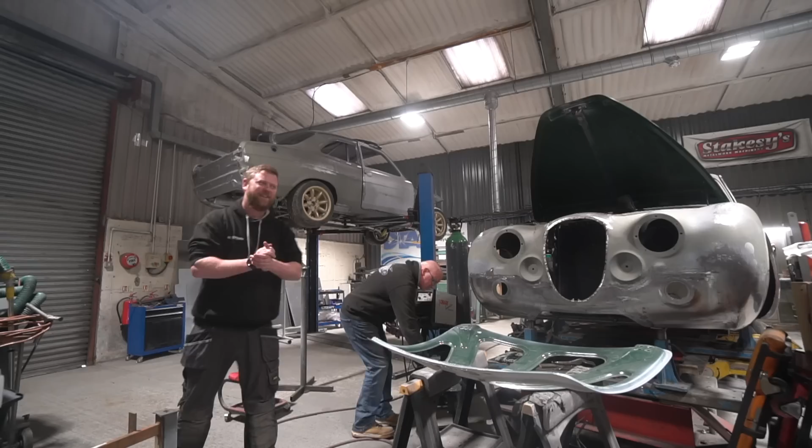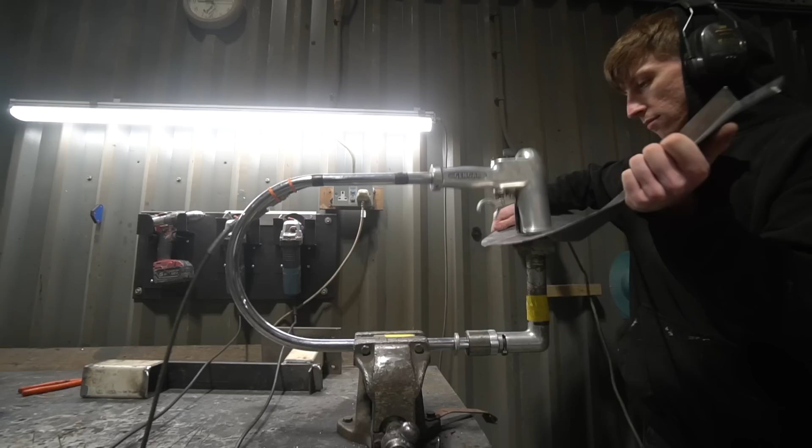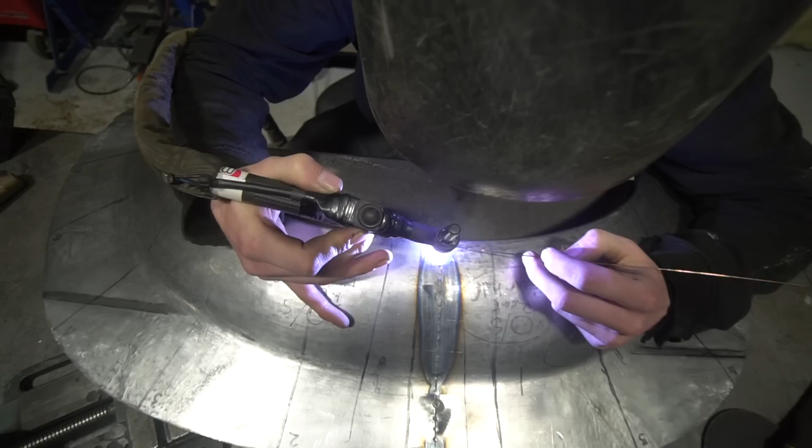I'm going to start with Project Kuma. We're obviously in the later stages of dry build on this. So essentially this week Sam's just been getting the subframes in, getting it to the point of rolling, so we can then get the front wings on, which is where Tom is continuing at the minute to do the hammer forming. In fact, I think he's done the hammer forming of the front arches, and he's at the stage now of grafting the halves. He's made them all in two halves, grafting the halves together, and then once that's done, that weld needs a degree of planishing to get the shape back in the arch.

So it's a case of welding the two halves together, putting them back over the hammer form tool and doing whatever planishing is necessary to get the shape back, so you've got one complete arch that's exactly the shape it should be. And once we've got to that phase, we'll be able to start cutting out the relevant bits of metalwork on this shell and grafting them into this shell. I'm not going to go massively into this one this week, but that's where we're at.

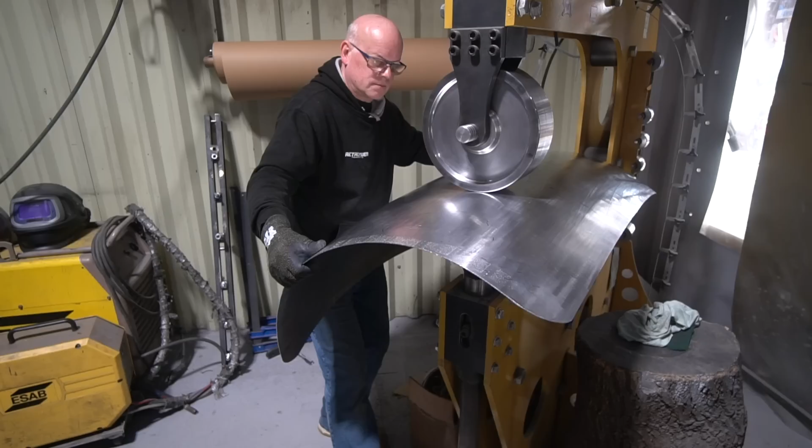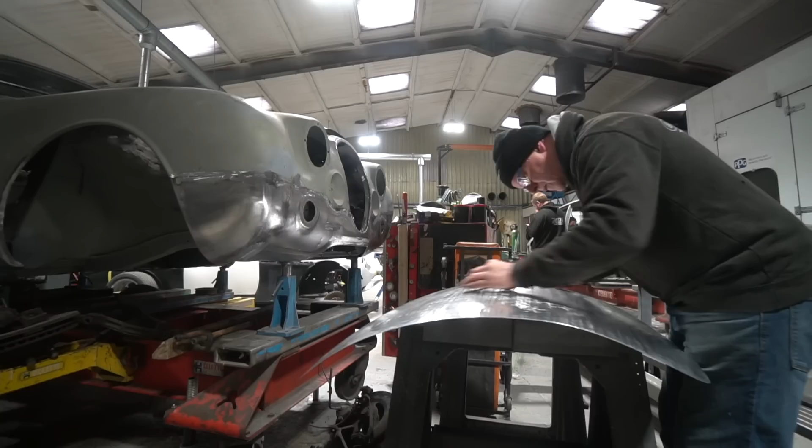Churchill, right, there's a few things on this, a few avenues of progress. One obviously right in front of me - Stu's been making the boot skin for this. This is actually very similar to Project Utah, the other 4-door Mark II Jag that we did, in that we're not only making a boot skin that deletes some of the original details - there's originally a number plate plinth on there which interrupts the shape of it - but also making it in aluminium.

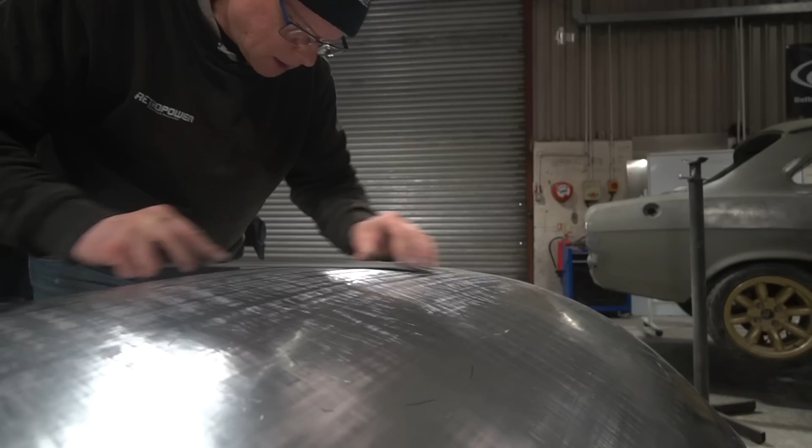If we're making a skin, it kind of seems logical to take advantage of being able to make it in a lightweight material. It's also easier, I should perhaps say, for somebody with Stu's ability to shape this sort of compound curve in aluminium because of its ability to stretch more easily.

So he's been wheeling that up on the English wheel, getting the shape in, starting on the edge tipping. So he's essentially now got a 90-degree edge, which will get it at this angle, ready for that to then be crimped all the way over 180 degrees to attach it to the skin.

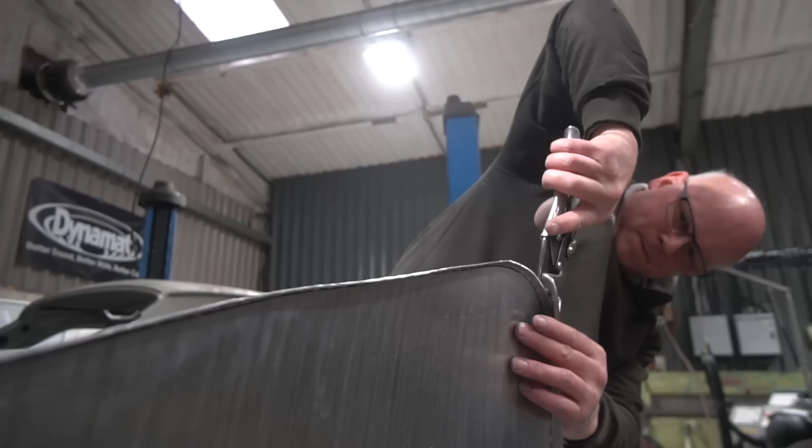But in readiness for that, because of the difference in thickness between the aluminium we're working with and the original steel, to get the panel gaps right he's been around and resized this flange around the edge here so that we end up with the same size panel gap with the thicker skin.

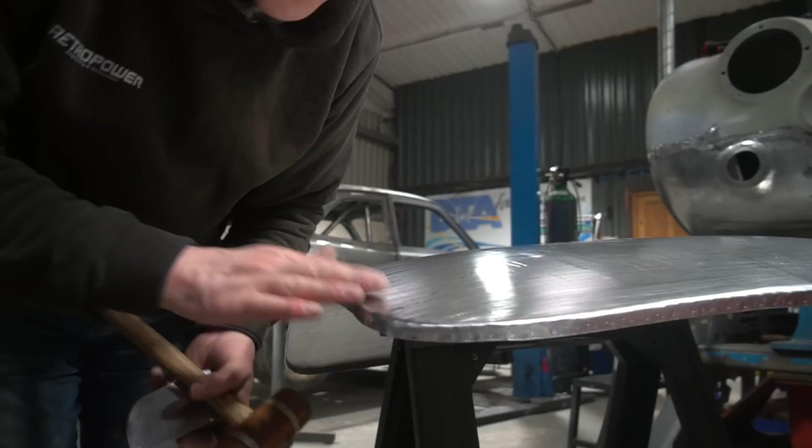And while he was at it, there's various holes on here which are access holes to components that attach to the original boot lid, which won't be attached to this. We thought while we're at it, we might as well delete those holes on the frame because they don't really serve any purpose after we've reskinned it.

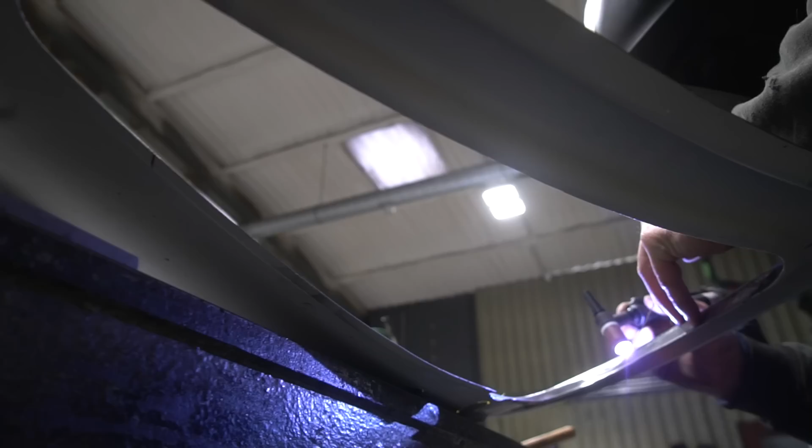So that's what he's done, and I think he's pretty much at the stage now of being ready to get that skin on. Next week it'll be getting the bonding adhesive on here, getting the skin on, hammering it all around, clinching it on. So we'll see that next week.

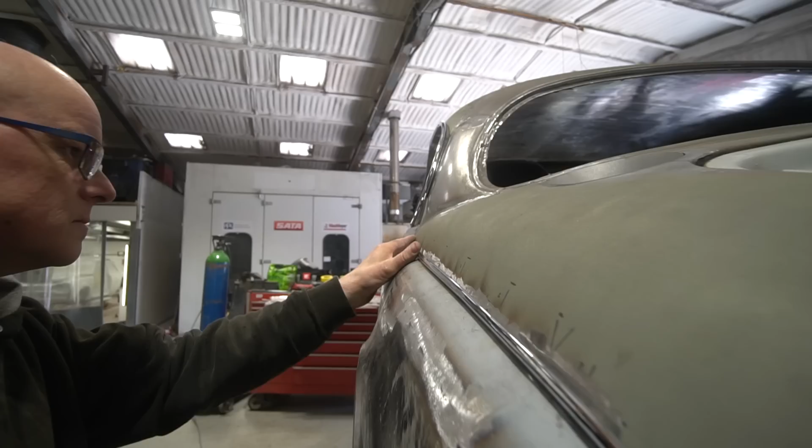There's been a few small details that Stu's been on with. One was looking forward to the chrome mouldings that go around the gutters. Obviously now we've done the roof shape change, the gutter shape is different, and we're aware we're going to need to come up with a plan there. We thought we might be able to reshape them, which we could, but also the B-post position is much further back, and originally the joint is above the B-post.

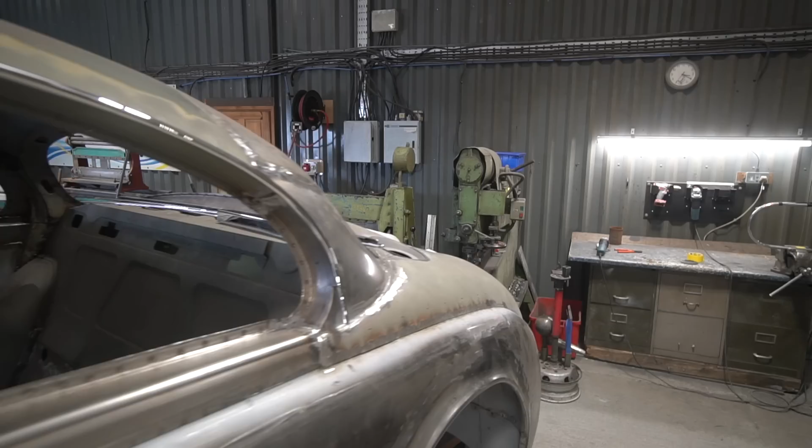Now it wouldn't be horrifically offensive if it was somewhere else, but it would be more logical if it was above the B-post, and it is quite difficult to form those gutter trims. So we're trying to come up with a solution that might solve that quite elegantly.

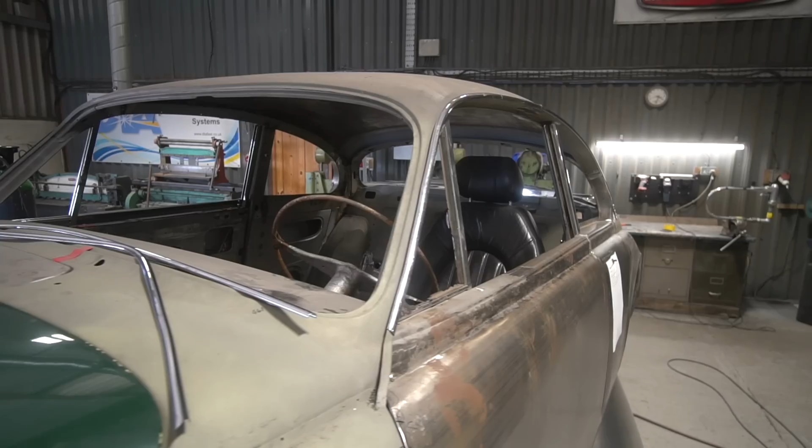One thing that Stu realised straight away is that on the E-type, the fixed head E-type, the rear part of the gutter trim is actually very, very close to the shape we've ended up with on the gutter here, more so than the Mark II trim. So we're contemplating using the rear part of an E-type trim, and trying to think of something that might be able to donate the front part and be long enough to go back to the B-pillar. Now we're wondering whether XJ Coupe ones might work.

I think there's more curve in this, but they may be close enough to work. So we've got a couple of those on the way just to try and see whether they work. Certainly they've got a similar screen angle and they'd be long enough. It's just whether the extra curvature in the roof is a problem or not. So watch this space on that one.

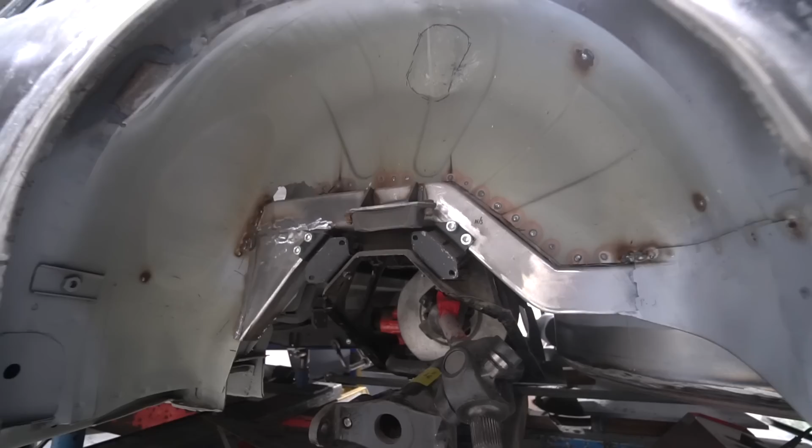He's also been on with the trailing arm mounts. This is now running an S-type independent rear end in place of the live axle. One of the things the independent back end has is a trailing arm, which does additional longitudinal location of the rear hub carrier. But rather than use the standard arms, because there's quite a nice structural section where the original trailing semi-elliptic leaf used to mount, it made sense for us to make our own mount that went into that channel, because it's a nice beefy part of the car.

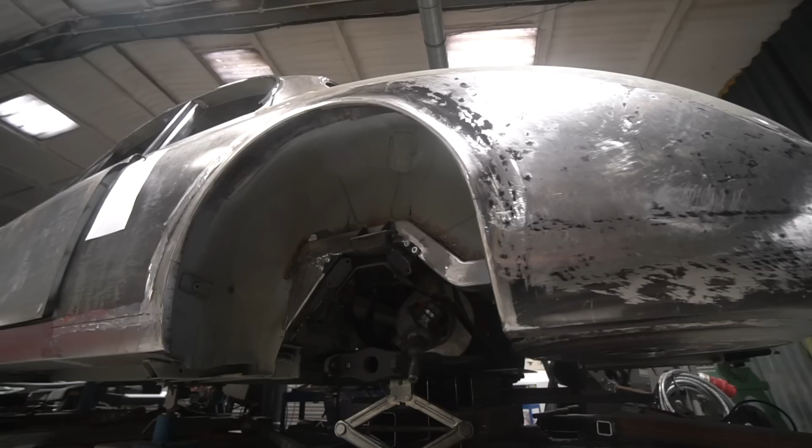So Stu's just fabricating some custom trailing arms that will go into that original section, which is looking pretty good. I think he's now drilled and made the tubes where they'll mount onto the chassis. He's got the main trailing arm bar made. He just needs to weld up the trailing arms, and we'll be about there with that.

So that's looking good. And then on the same subject of suspension, we've obviously previously shown some of the progress on the front cross member. That's now coming together really well.

Just as a bit of a recap, because I'm not sure if it's been concisely mentioned before, the reason for wanting to redo the front end is that on the original Mark II, it's a steering box. The original suspension arm system has zero caster. It's just a straight up hub carrier, which means there's naturally no self-centering.

Now what they did to combat that is have the arms mounted in quite a significant trailing way, on a big angle. That gives you some degree of self-centering while still keeping the steering really light by having no caster. But in a car where you want a bit of a performance edge, especially with rack and pinion steering, it's very preferable to have a reasonable amount of caster angle on there. So that's one thing we were trying to improve, is basically a nice positive feeling of self-centering on the steering.

We want it to be a quicker ratio than the original. And then the other problem we have is that with the significant trailing angle on the original wishbones, it really limits your lock. These didn't have very much lock originally. And when you actually want to go with wider tyres or wider wheels on the front, you massively limit the lock, because the wheel rim actually hits the wishbone before you get any significant amount of lock on.

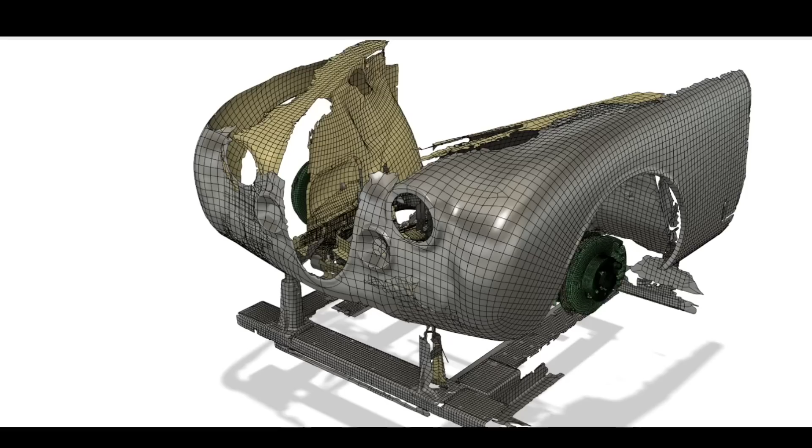So we wanted to redo it with arms that were closer to being straight out, not as angled back, with a reasonable amount of caster angle on there, but preferably using quite a lot of original equipment parts. So the plan that Nat came up with was Jaguar XJ arms and geometry, with a slightly shortened upper arm, which gives you a little bit more camber roll but works with the dimensions of the inner wings on here, XJ hub carriers, and then a steering rack, which we've been trying to puzzle out which rack to use to give us a lack of bump steer and the correct Ackermann angle.

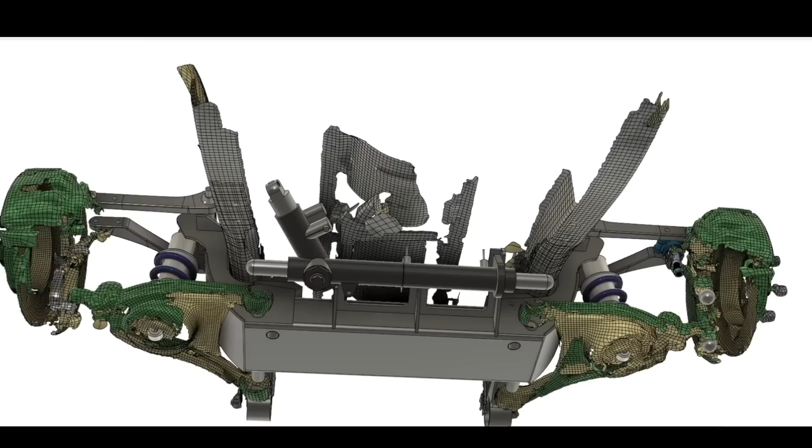And we actually eventually came up with a rack from Detroit Speed Engineering in the States, DSE. This is going to be left-hand drive, and consequently, being an American company, the racks are left-hand drive, but it's exactly what we wanted. The rack centre-to-centre ball joint width is 21.5 inches, which is very narrow for a rack and pinion rack. And the angle of the pinion's just perfect.

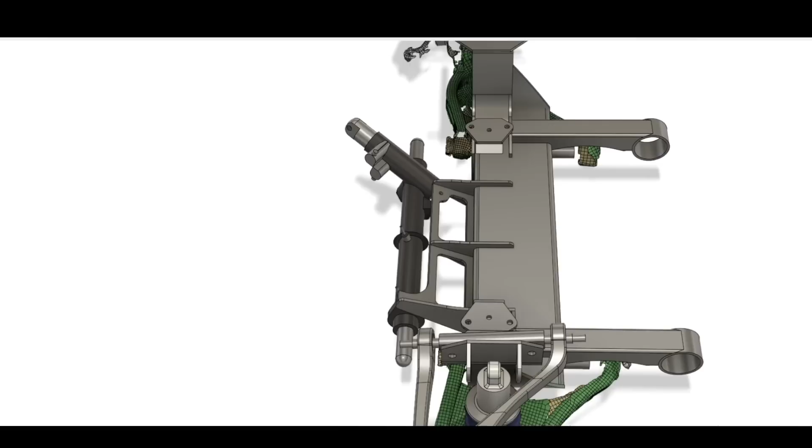So we've got to the point now where George has finished all the cross-member design. We've now confirmed that that rack will work. We've got the rack in the model, so we can check that the alignment of everything works there, that there was clearance on the sump, etc.

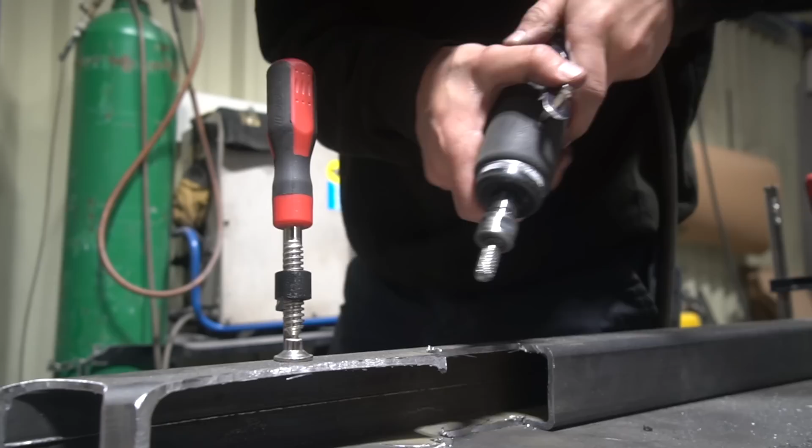And got to the point where George can now generate some engineering drawings and hand over to Sam, who's going to be fabricating that crossmember, which he's already started doing. I think he's cut most of the components for that now, and he's in the process of actually fabricating that front subframe assembly. And that's really the last bit before we can get this rolling.

That's the bit we've been building up to, wanting to get this off the jig so we can get it rolling, carry on some of the dry build jobs that need it to be off the jig, on the ramp particularly, and that was the last piece in the puzzle.

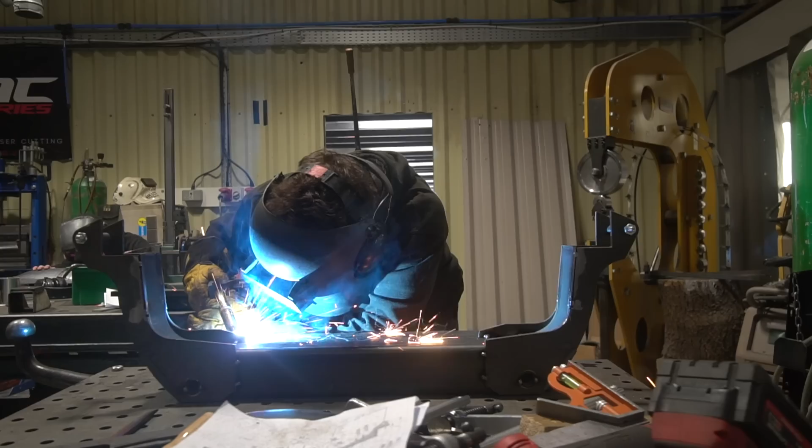Once we've done those trailing arms and got the front crossmember built, we can essentially get wheels on it and make it rolling. So that is certainly a phase we're all looking forward to on this. Just trying to think if there was a couple of other bits.

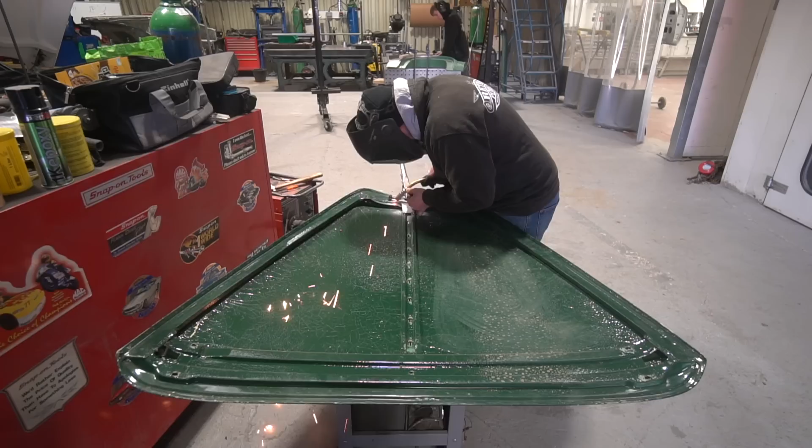I think one of the things Stu was working on was the bonnet. As Nat mentioned previously, it took us a bit of toing and froing to find a condenser and radiator arrangement that would work, getting the fan, radiator and condenser all in front of the engine. One consequence was needing the bonnet latch to be slightly further forward to clear the front of the condenser. Also tackled in with that job was wanting a readily available bonnet striker and latch, and we ended up using a Range Rover Classic bonnet striker and latch. He's done a bit of fabrication work on the bonnet to get that fitted slightly further forward than standard, and done a matching piece on the slam panel, which will work a treat.

He also did the subwoofer mounts in the boot, so we're at that point where we're thinking about things like audio installations, which is always a pleasant phase of the metalwork to be at.

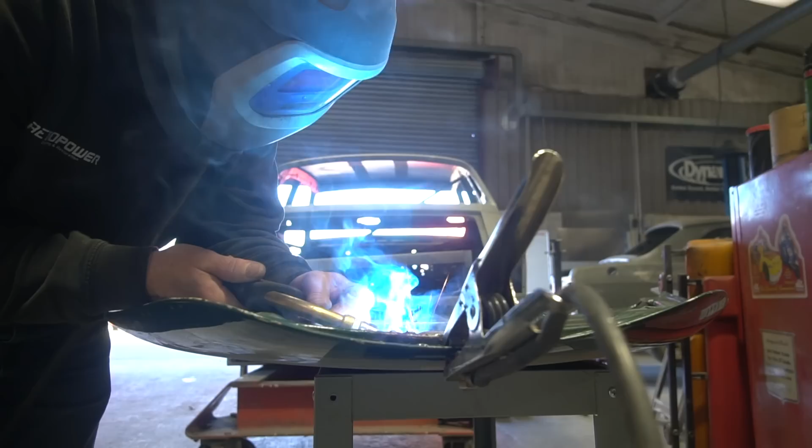Right, so I'm going to hopefully not trip over this massive stash of metal. We'll talk about the CV8.

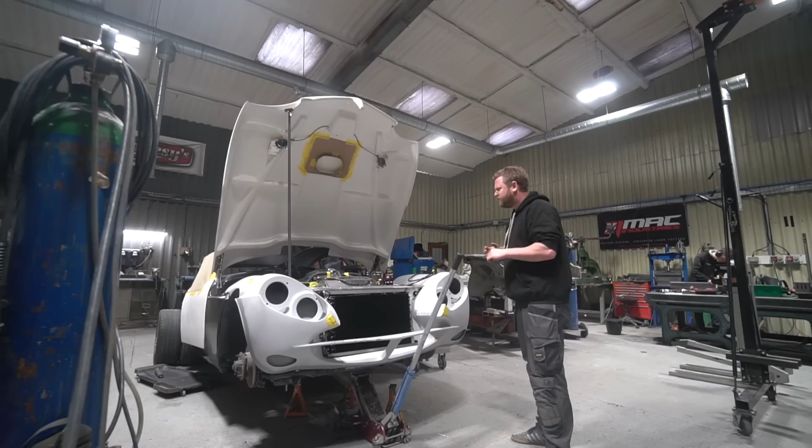So Bobby's been on with this. Two main areas of progress this week. One was some braces between the front of the chassis and these fiberglass inner wing sections.

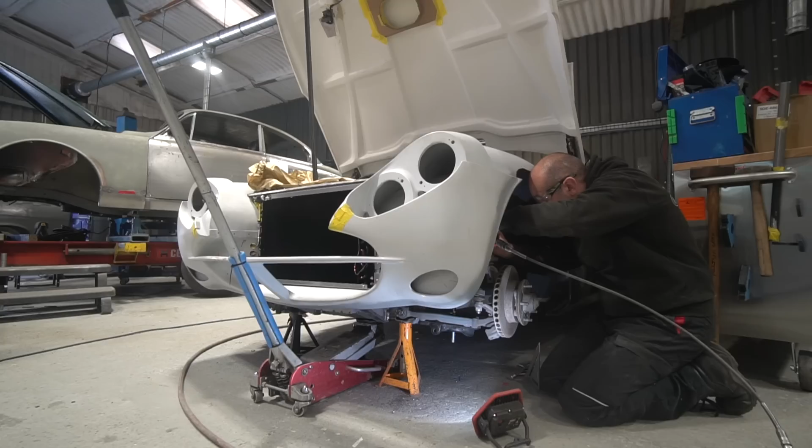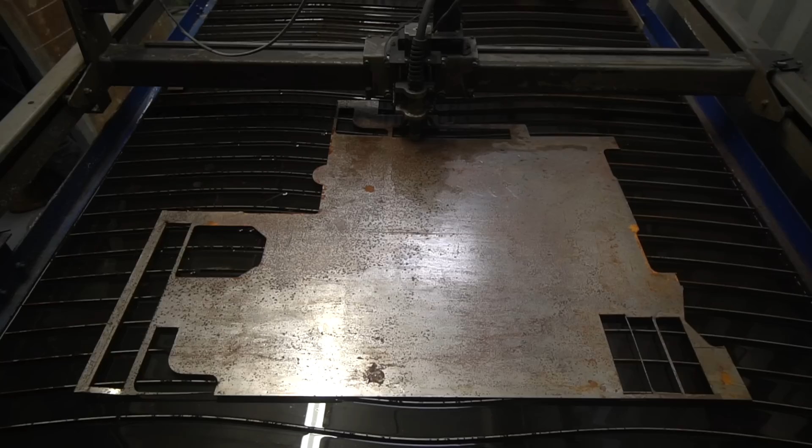This upper radiator mounting section here, which is how they are originally, bolts onto some studs that are captive within the fiberglass of this, but there's nothing actually bolting that part directly to anything particularly structural. It's attached by these radiator side mounts here, but we decided to make that whole assembly more rigid. We'd do some braces between the cross member and the underside, so rather than these being captive studs, they become bolts that go all the way through and sandwich the inner wing between the cross member and this upper radiator panel support / air intake support.

So he's been on with that. That's gone really well, just a fabricated part that goes on there.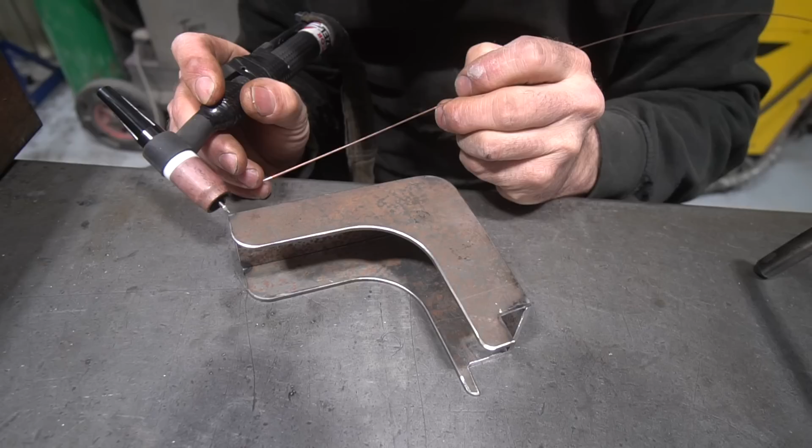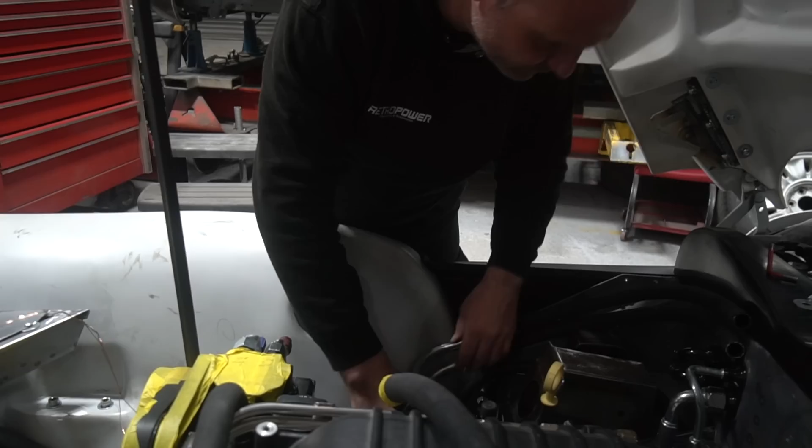And then more plumbing work, heater pipe work he was on with. He's done these nice neat aluminium formed lines that go around the back of the inner wing there, which look really good, with a little H-pipe section on there. Something on these LS engines, you need a little bit of circulation because we put a water valve in on the heater circuit which shuts the circulation off. You need something to still allow some bypass, so there's a link pipe between those two.

He's also done the radiator bleed pipes. On these LSs, they have a little push-on spigot for the radiator bleed or coolant bleed, to bleed any air to the top of the radiator. We were looking at doing that neatly and decided it would be much neater to do threaded fittings on it. So he's converted both of them to have AN3 threaded spigots, so we could do threaded braided type hoses between the two there, and then one coming out to the radiator which will also have a threaded spigot to match.

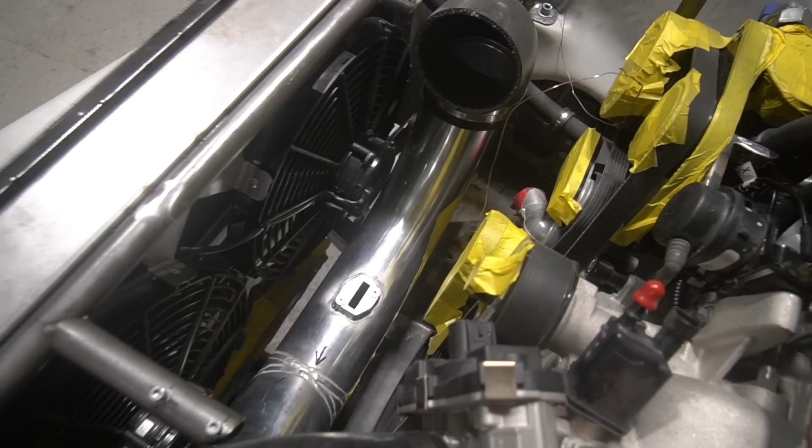He's done the breather lines and the pipe for that, just hanging at the minute, but that will go onto a spigot on the air intake pipe here. And I think that was one of the plumbing jobs he'd done, which is going to escape me in the heat of the moment.

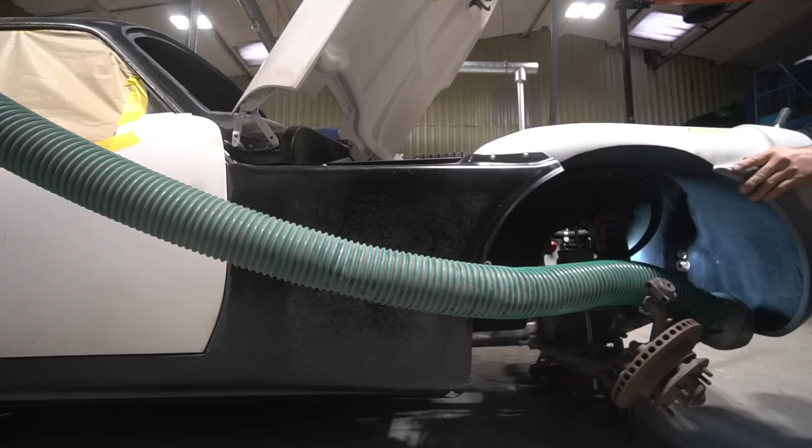Yes, I forget what it was. But that's basically what he's been on with - the heater pipe work, the remaining coolant bleed pipe work, breather pipe work, and the supports onto the chassis. So yeah, continuing dry build on that.

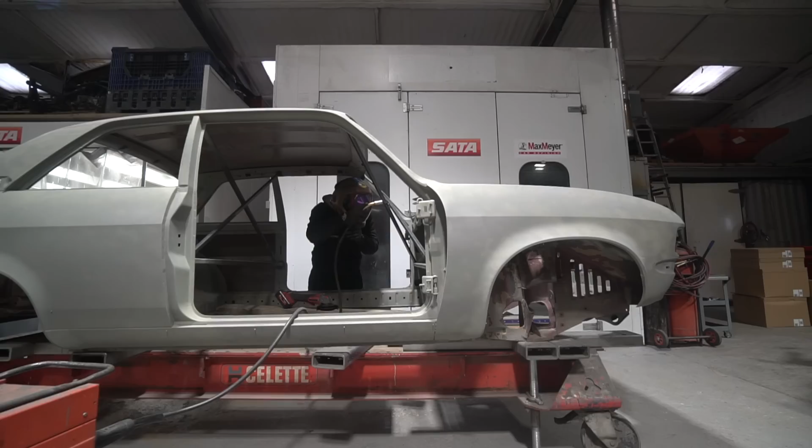Allegro / Integra. We are very shortly going to be starting to strip out what we don't need of this body now. We've obviously been preparing the chassis for that moment, but we're very close now, and I think this coming week we'll see Scott starting to cut all the superfluous bits out of that.

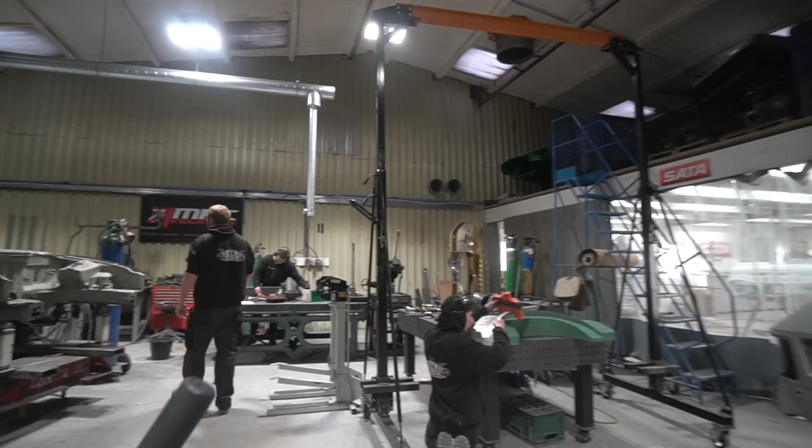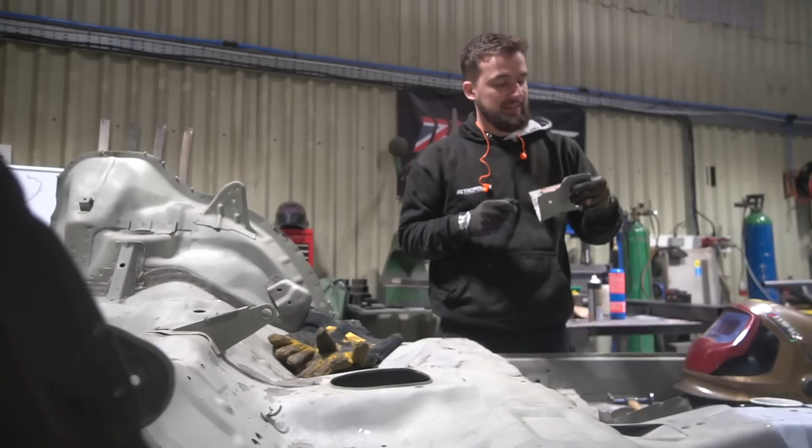This week he's been on with finishing off the rot repair - I think last week we saw him doing the rot repair on this section of the body here. He's finished the other side now. There was a reasonable degree of rot in it, in an area where the subframe mounts at the back of the sill here, so definitely worth doing right.

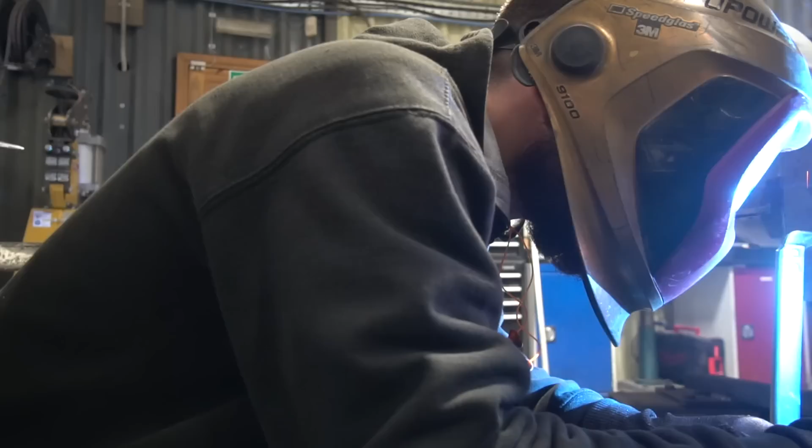It was one of those rot repairs where there were lots of little frilly bits. It was almost a debate over whether it needed the whole section replacing, but as is often the case with these things, you're better off just cutting it all out and making a new piece. So rot repairs completed there, and then he's been finishing off the chassis shortening.

So the recap on the reasoning for that is the wheelbases are a little bit different. I think 100 and something mil different on the Allegro to the Integra. So we're shortening the Integra floor pan by that amount. Nat showed previously we made a sliding jig to slide the rear section of the floor pan forward, and then the cut lines were chosen so we could keep areas that mated up nicely, but also not lose too much strength by having a cut all in one plane.

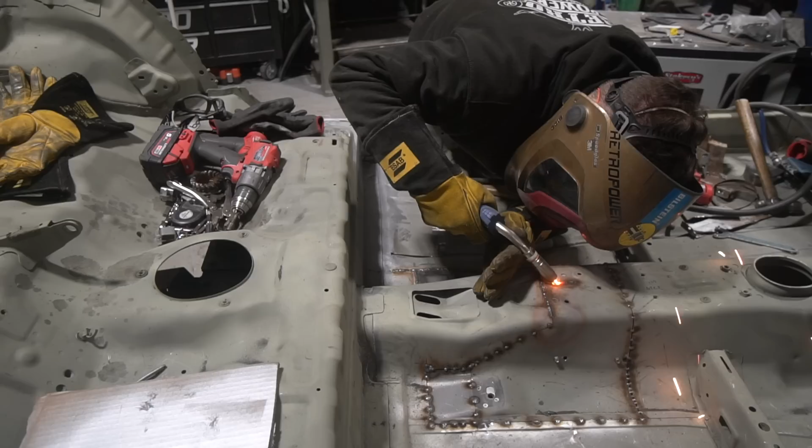So the lower section of the tunnel here, which is double skinned, was left intact, so that wasn't cut at the same point. And this week Scott's been fully welding - I think this was tacked in last week, but he's been fully welding all of these sections in.

We also discovered the back of the floor pan, where it joins the rear bulkhead piece, was a little bit frilly with corrosion, so we pulled that seam apart. Scott's made a new back edge of the floor pan to get rid of that rust. So yeah, floor pan looking good.

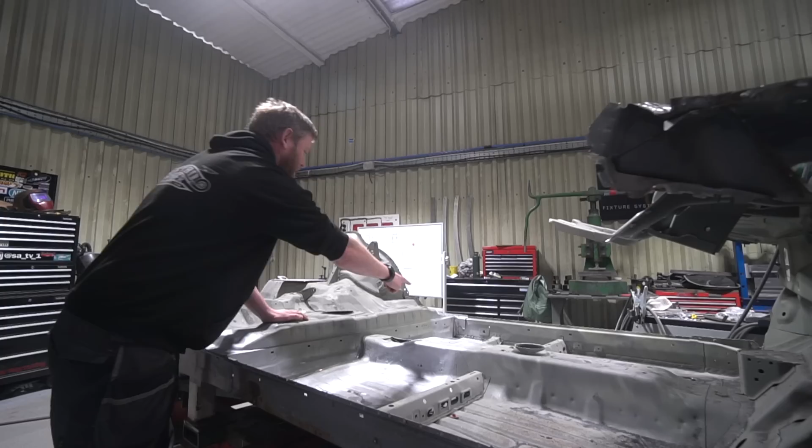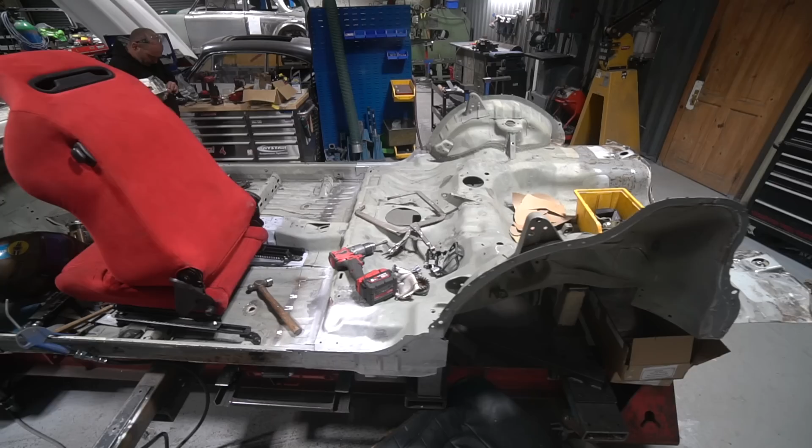He's also done the seat mounts. Obviously when we shortened the Integra floor pan, there was a section cut out that had the seat mount on it, so they've now been reinstated - on the inner part here, because we're going to be using Recaro seats in it. We probably won't use the Recaro seats the Integra used to have, but those Recaros have the same mounting points as the Recaro LXs, the classic range Recaros, which we probably will be using. So it makes sense to use the original subframes and just mount the revised seats onto those. So seat mounts are going back in.

So yeah, it's kind of all getting to that point where we've got enough out of the way now to simply drop the Allegro body over the top. So that's a bit we're all excited to see. If I just do a little reverse over here.

Just with the paint booth in the corner of my eye - the Ascona, the orange Ascona, went back to the owner on Saturday. He picked that up, really happy with that. Obviously going from the disappointment of an accident-damaged car to renewed enthusiasm to get it on the road this summer, so he's got that back.

And then the guys have been carrying on with the Project 1 Escort, which I think Mark had just got into epoxy last week, so most of this week has been guide coating and block sanding epoxy.

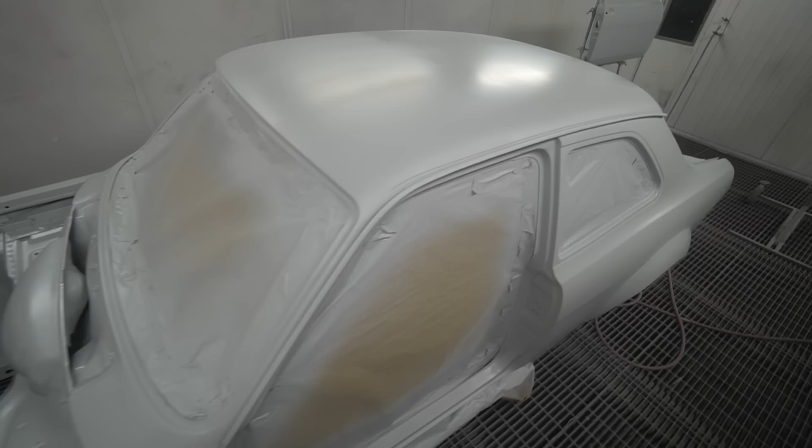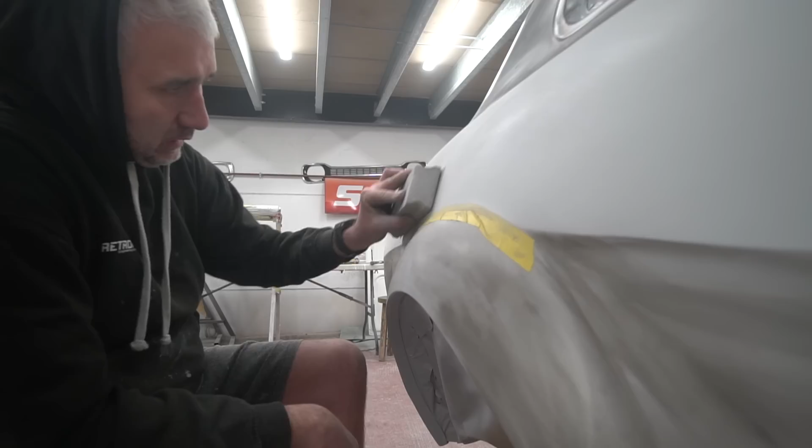The harder detail work being on the arch extensions, because we've got this transition between the new arch and the original body shape, and it's quite a tight radius, but on the curvature of the arch all the way around, trying to keep the accuracy of that radius where it blends from the arch shape into the body shape, and not lose the definition and not have it looking like a 50p piece, was probably one of the more challenging parts. So again, a bit more employment of that technique of turning the lights off in the booth, casting shadows over it, and trying to make sure they're happy with everything. But it's really looking good, actually.

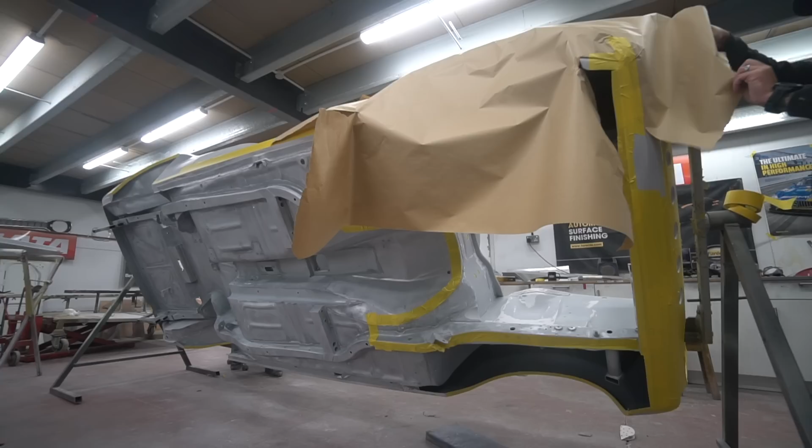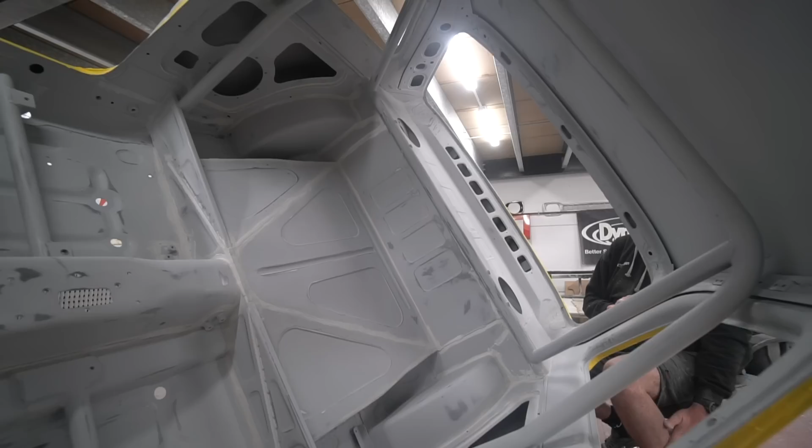They've got it back on the rotisserie now to do the underside, so final prep on the underside, with a view to getting the whole thing in Raptor, so the whole underside will be raptored. At that point it's completely watertight with epoxy primer on the outside, Raptor on the underside, and then they'll do the final wet sanding prior to the final paint, so I don't think it's very far off. I'd say next week we'll see Raptor on the underside and inside, and probably final prep for paint, and maybe the week after we'll see final paint, who knows.

Right, follow me through here. Cool. I don't think I've got the stamina to do the full tour anymore. We're used to these little half tour sessions.

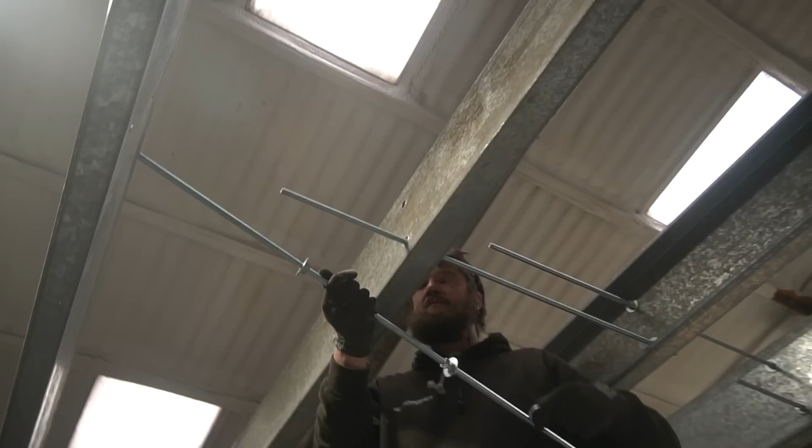Okay, so in here, this is the reason I'm doing the full tour - a complete new extension to the mezzanine upstairs. And actually this is leading up to a new department, if you like, in that we're introducing a wiring harness build area. Now, we used to do wiring harness building here on a fairly basic level. We've been shipping it out to Max at Bremax for a long while, who has always done and continues to do an amazing job. But it's something at the back of my mind we wanted to bring back in-house, just so we've got much better control over everything.

And also, the same person who's doing that can oversee all of the electronics, as it was before. I was kind of doing the electrical overview planning, other people were doing mapping, somebody was doing PDM programming, maybe me doing graphic design for displays, and Max doing the wiring. I want to get everything together with one person doing that, so I think in a couple of weeks' time, you'll probably meet that person.

So as you can see, carnage in here. Now, we had the imp here last week, which is now gone. Can you just, somebody just knock the music down a bit? Jim, can you just turn the music down, please?

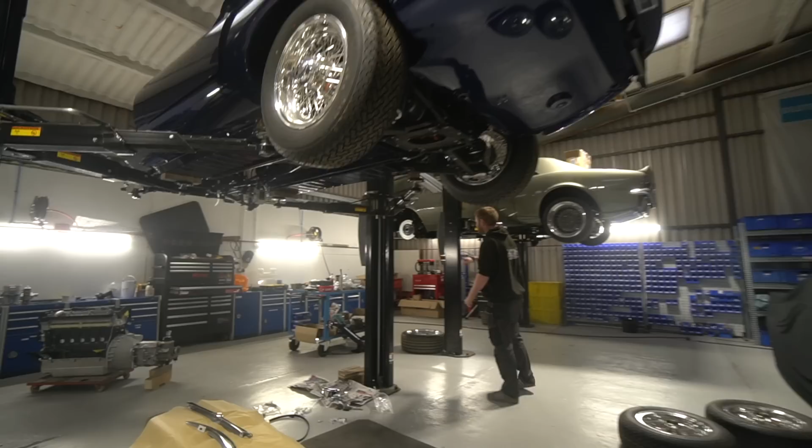So we had the imp here last week, which has now gone, and that was like striking while the iron was hot - with the imp gone and the Ascona gone, to move all the cars out from under the area where the mezzanine's being built so we could build that. Consequently, it's absolute carnage with everything everywhere. Right, Jamie, if you go over there, I shall loiter over here.

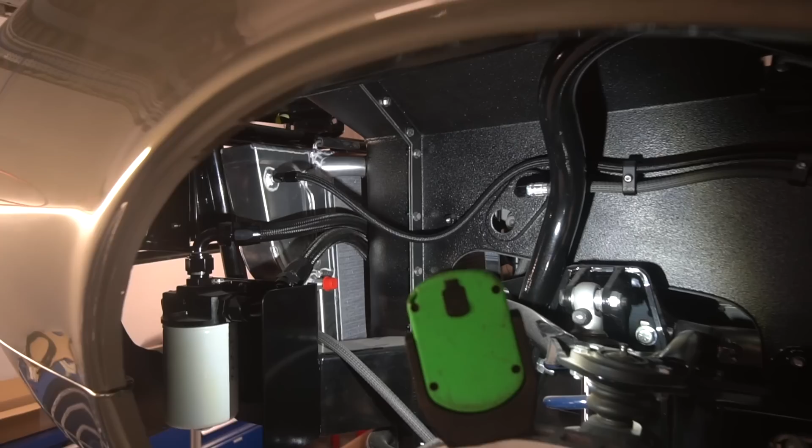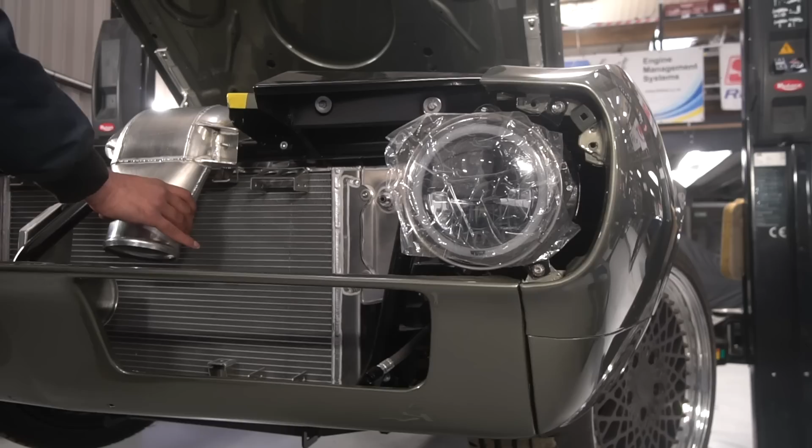So, on the Camaro, we saw the radiator come back last week. John's now got that mocked up in there. That allowed us to get the inlet tract tested and checked to make sure it didn't foul the radiator in any way, which it didn't, so that's gone for anodising, and I think that's actually just come back today. It's enabled John to carry on with some of the plumbing - finishing the cooler plumbing to the oil cooler, or at least checking it all fits before we take the radiator back out for paint.

Likewise, the aircon plumbing on the other side. And then another thing on this week, with this one, the prop shaft, which we had made up by Hauser Racing, that arrived, that's been trialled on there, that's all looking good. So I think it's essentially radiator back out now, so that can be painted, and then I think all of that can go in for the final time.

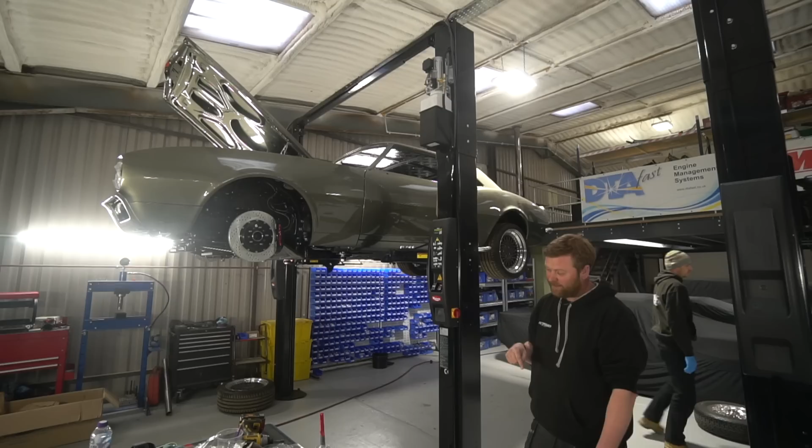No, I'm losing it. I'm losing my marbles doing this full tour. There's so much to remember. The fill ports for the radiator and power steering tanks.

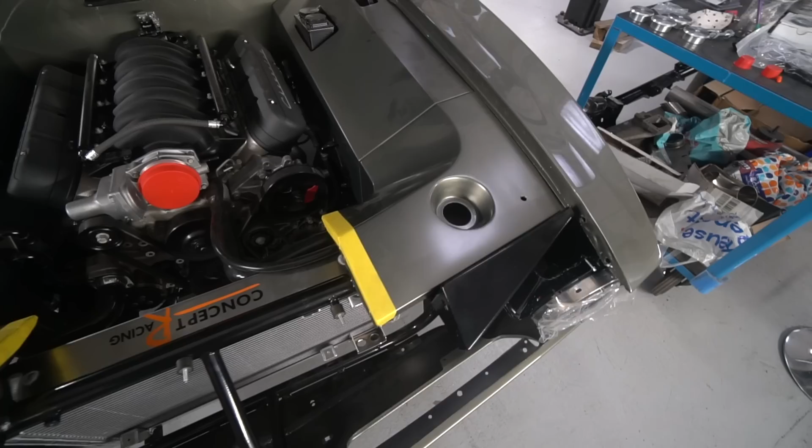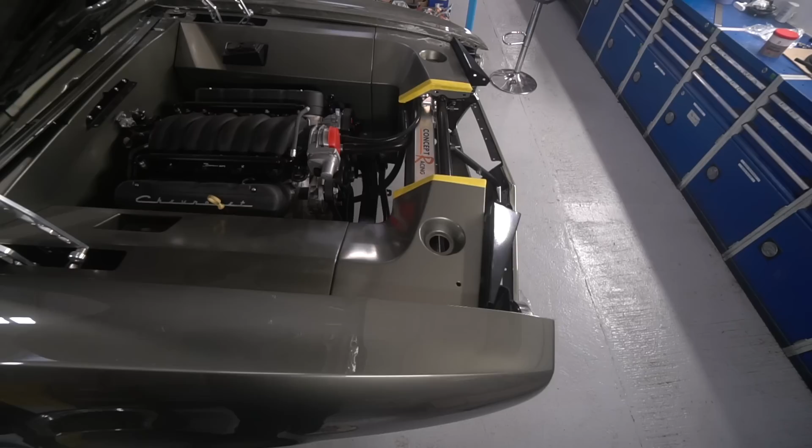This was one of the reasons for getting the radiator back in at this stage - we had it made without them, so we could make sure they were absolutely concentric within the little orifices in the engine bay. So we're going to mock those up, get those tacked on in situ, then remove the tank and the radiator, weld them on fully, so we can be absolutely sure they're in the middle of those holes. And then once that's done, we'll get the radiator painted, get that in, and that'll be in for the final time.

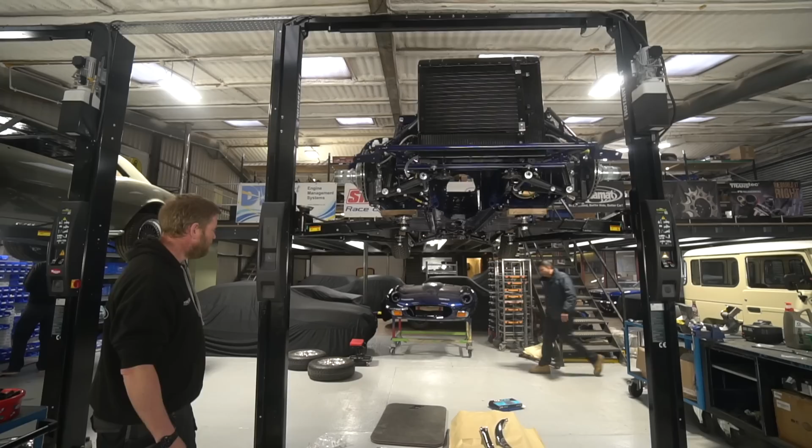So chrome has been probably the subject of the week on this one. Adam's been on with all sorts of things on the bonnet - there's the chrome mouldings that run down the join line. For those that don't know, there's a slightly odd construction method on the E-Type bonnet. You probably remember if you watched a long while back when we painted this - on the very first one, it made more sense.

The Series 1 E-Type bonnet - the central part was one piece, the two sides were separate, and they all bolted on. Series 2 onwards, they decided the seams at the bottom are ugly and they actually get leaded over. So you've got a seam along the top of the wing which you can unbolt, but that still doesn't mean you can take the side off because it's welded at the bottom. Nonetheless, you still have the seam at the top, and the reason there's a chrome moulding there is essentially to cover that seam.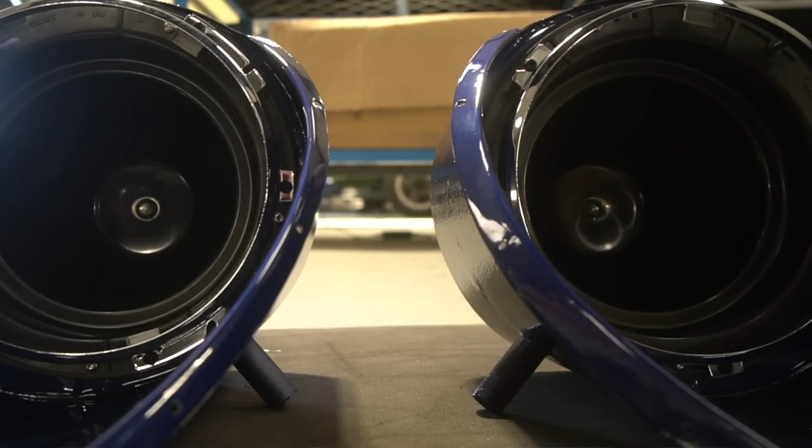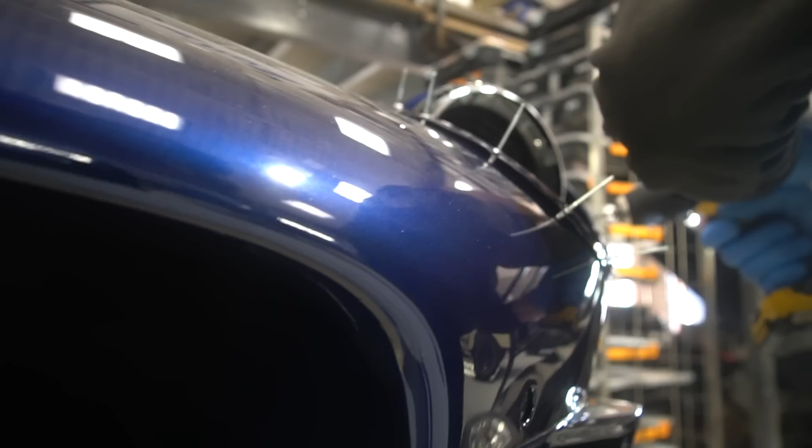So Adam's been fitting those, and then he's assembled the headlamp bowls - that's like the painted back shell, if you like, and then the actual lamp holders themselves that are going in there. And then he's offered those up, just made sure all the rivets fit between the actual surround and the main part of the bonnet. Those bits actually go in, they rivet in, and they use a special kind of rivet that's got a head on it that some chrome mouldings fit onto afterwards. But they're all looking good.

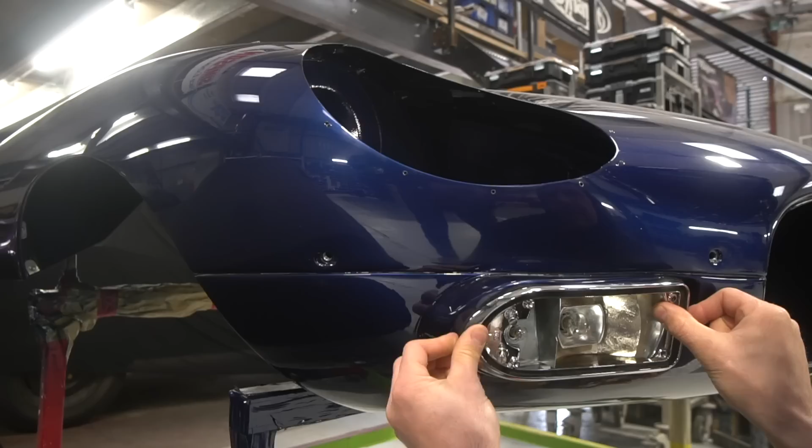And then he's got the indicator/side light units on there, and he's, by the looks of it, just fitting up the front bumpers. So yeah, it's quite exciting to see that come together. It kind of gives you a little visual reference to the final look.

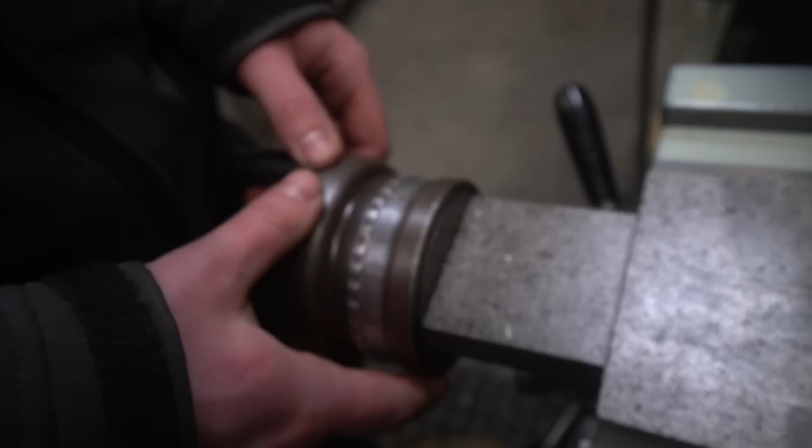And I think other news on this is - yes, Jamie just helped me out very conveniently there - machining of the knock sensor bosses.

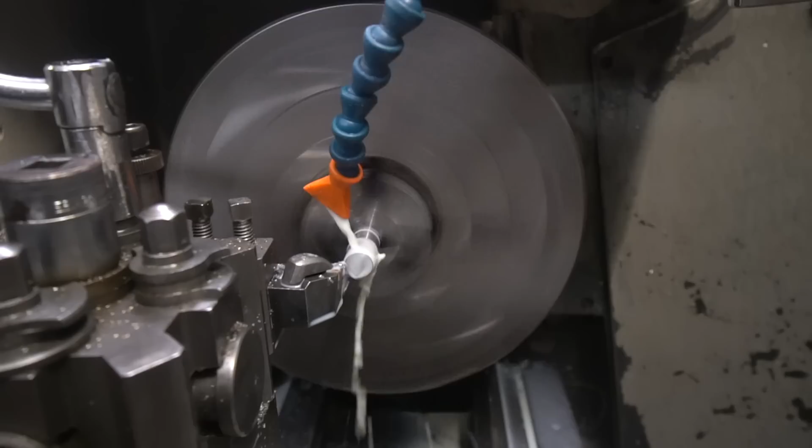We touched on that last week, we were doing some knock sensors, and we'd love to do them mounted on the block somewhere, but unfortunately there's nowhere on the block we can mount anything. So we're doing knock sensors in the coolant bungs that sit in the head between the spark plugs. Not a terrible place for them, just not as optimal as it would be towards the top of the block.

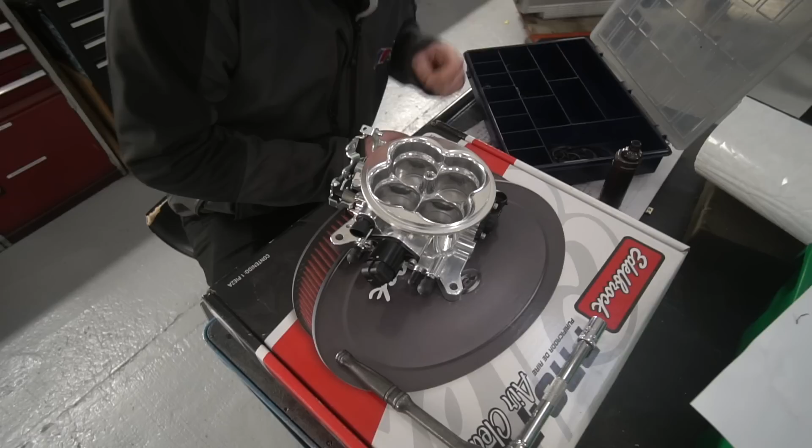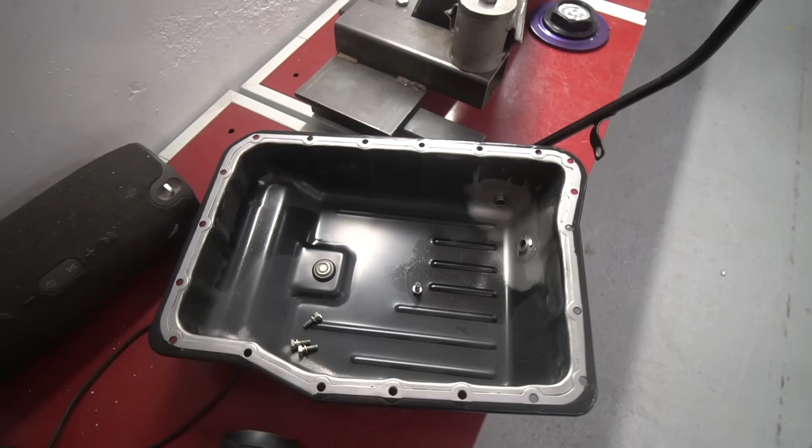Right, Land Cruiser. James has been largely on with the Land Cruiser stuff, and it's the cable that goes from the throttle body to the gearbox. We mentioned last week there was this pivotal moment of getting the fuel rails and manifold back so we could get all that in, the fuel system tested, etc. There's another knock-on effect that had, is that we haven't yet got the transmission sump on, because you need that off to access the cable that goes to it from the throttle body, which is not just a kick-down cable on this. It's a fully mechanical auto transmission, intentionally chosen so we didn't have any unnecessary electronics on the car. But it gets its load information from a cable to the throttle.

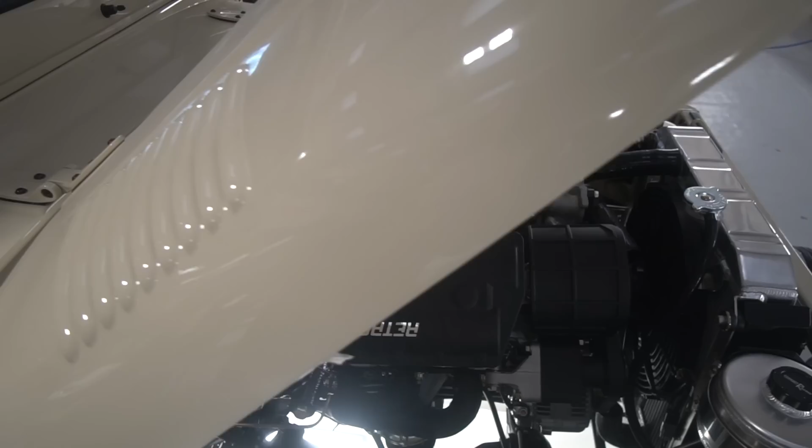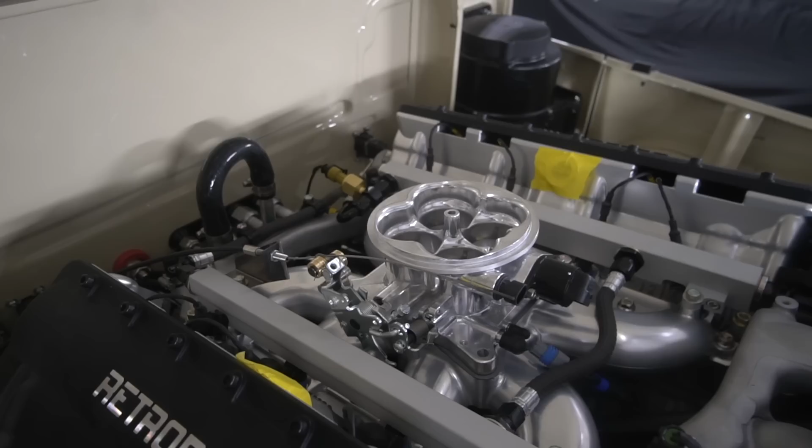So we need to do that cable, and that was kind of standing in the way. Now we've got that in there, we can design the bracketry to mount that cable. We've got to work out all the leverage ratios to make sure it pulls the right amount. We also want some adjustability in it, so we can vary the ratio of pull at the gearbox end versus throttle openings, which will be the only adjustment we have to harshen or soften the shift quality. So James is just in the process now of making up that bracket, designing all the mountings at both ends, making up the cable. That's the next step.

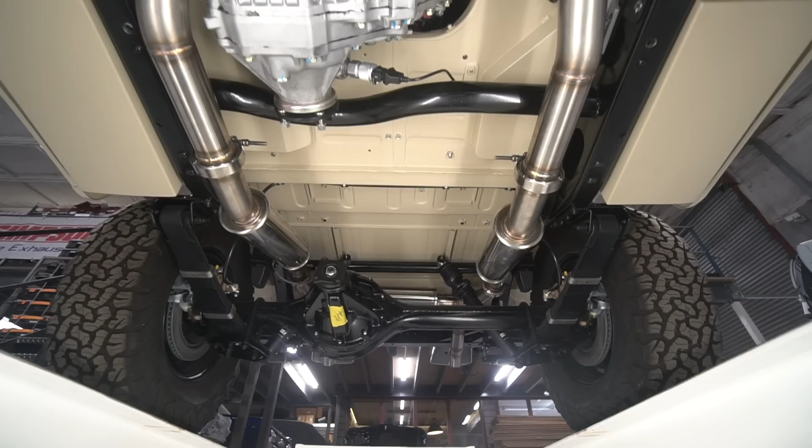And he's also got the main throttle cable to make, which will be less complicated. But with that done, we can put the transmission sump on, fill the transmission oil, and then we'll be happy to turn the engine over.

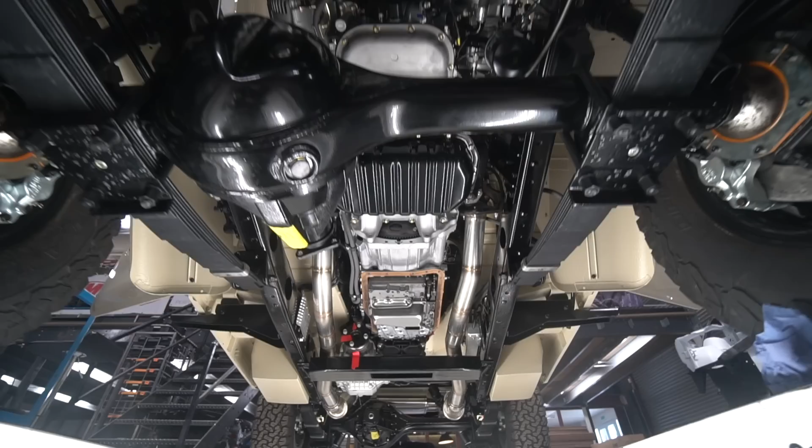In preparation for that, John's put a mechanical pressure gauge on the engine, which is part of our normal first progress towards first fire up routine - pulling the plugs out so there's no cylinder pressure causing load on the bearings, then turning the engine over with a mechanical pressure gauge on it until we see oil pressure. So the first time we actually fire the engine up, we know there's going to be oil pressure there, via a mechanical sensor. There's a gauge on there as well, which we can double verify, but we always prefer to have a mechanical one on there so there's no question mark over the electrics - cranking the engine over for hours thinking you've not got oil pressure when you have.

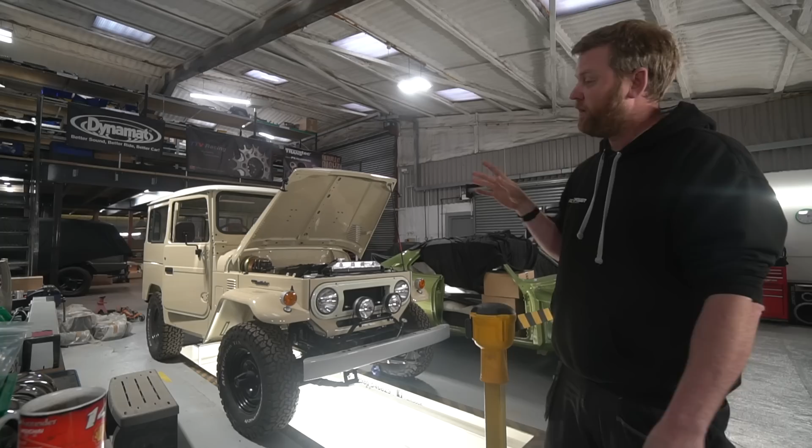So it's all coming down to that first fire up, which hopefully the 10th of May will be - the first electronics programming session on the engine ECU to get something in there and hopefully try and fire it up for the first time. I think actually that's been an absolutely marathon session, but we must be about getting there.

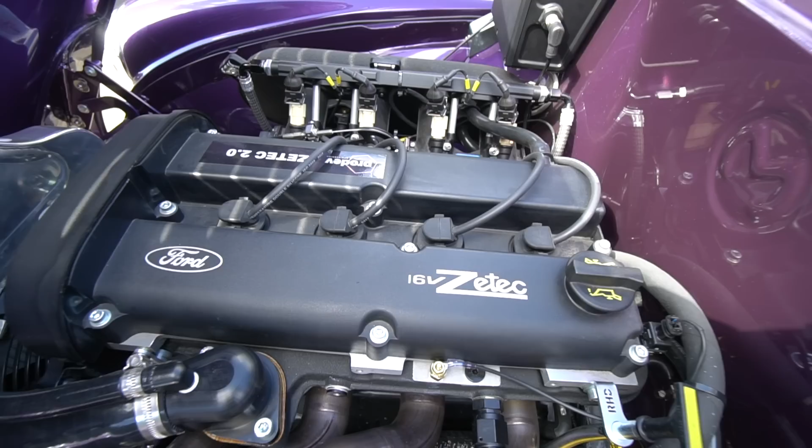The Morris is probably the remaining one. A lot of the cars have been covered up to stop dust getting from the construction, so I've got no visual clues here. But the Morris, I went out in that this week for another test drive session, which gave me a few little tweaks I wanted to do.

Nothing major. We lost power steering, and we had a problem with the power steering before, and it's all come down to the pressure relief valve in the pump sticking. Now it was a remanufactured new pump, and we still had problems with the pressure relief valve sticking, but I think we've solved it now. So that was the first thing I wanted to get out of the way before taking it out and getting a few more miles on it. But so far, very promising.

And I also got on to finishing off the boot trim installation. Last week Dean delivered the upholstered boot panels back, so I've been getting those installed, getting the carpet in the boot. James, last week, finished off his micro-switch installation for the boot light. And so we've got all that together now, spare wheel in there, that's all done. Further road testing on that, and we'll see where we get to with it.